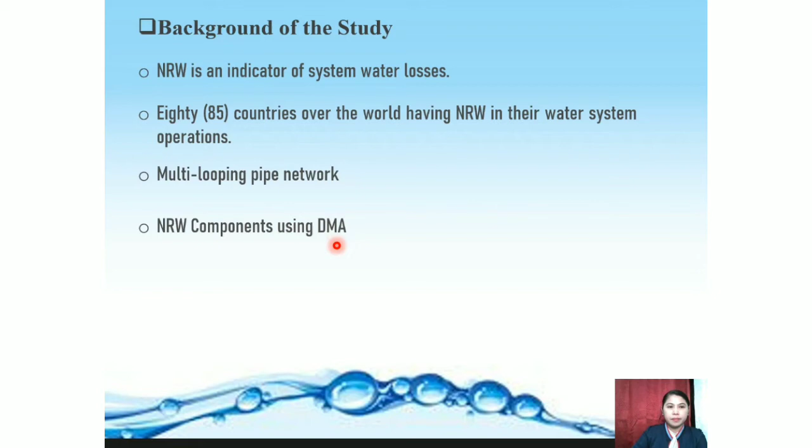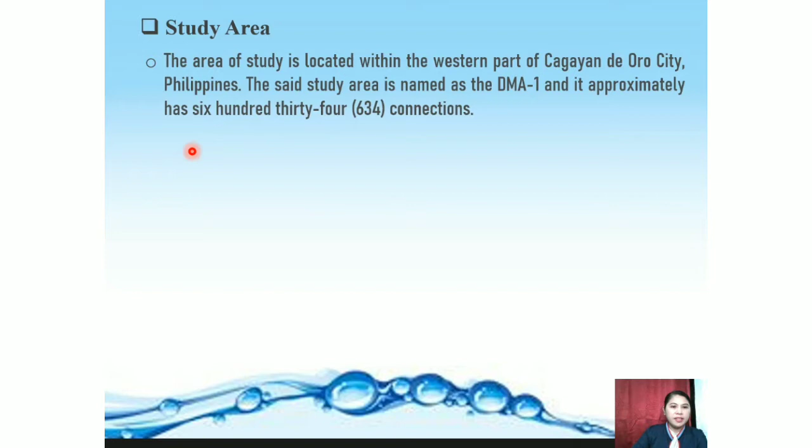The area of study is located within the western part of Cagayan de Oro City. The said area is named DMA1 for reasons of confidentiality, and this area has approximately 634 connections.

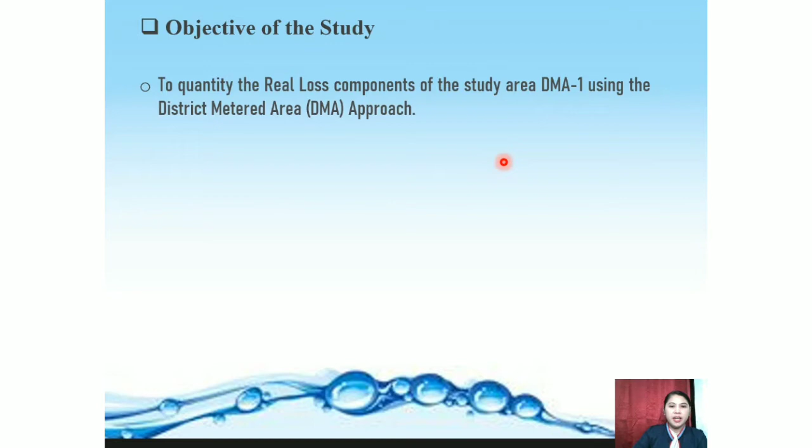The objective of the study is to quantify the real loss components of the study area, DMA1, using the district metered area approach.

For the methodology: it involves identifying the baseline, quantifying real losses through the minimum night flow, and determination of current real losses, as well as determination of unavoidable real losses.

The next step will be establishing the water balance. After establishing the water balance, the next step will be determination of the non-revenue water and determination of its real loss components.

The next steps will also include interpretation of the DMA data, the step test, leak detection and repair, and finally water loss reduction.

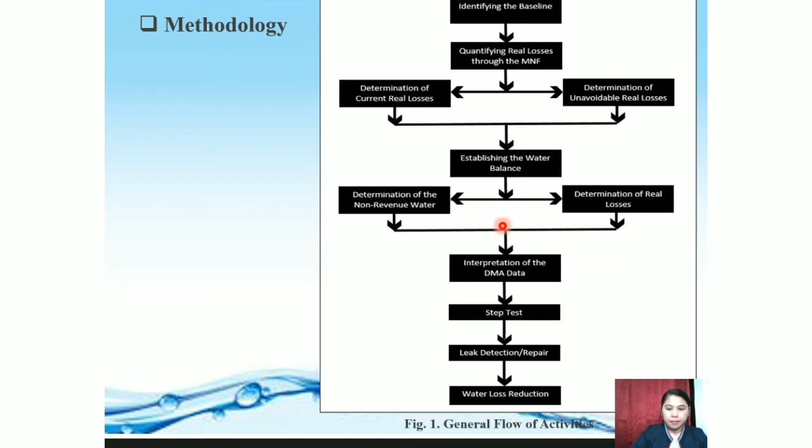Now, the formula for quantifying the current real losses, or CRL, is through the use of equation number 1 and equation number 2. In order to get the CRL during the minimum night flow, this is computed through the equation: CRL at minimum night flow equals flow during the minimum night flow, less the residential night consumption and the residential leakage.

Please take note that the CRL, or the leakage, will vary over the 24-hour period during the day, since the pressure varies according to the 24-hour time pattern. So if we want to get the CRL at any time of day, it has to be multiplied by the night-day factor. The night-day factor at any time equals the pressure at that time of day over the pressure during the minimum night flow, raised to the power of N1.

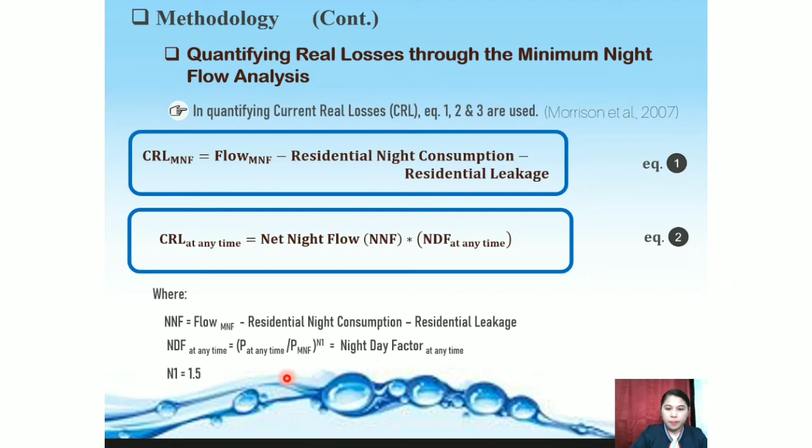This N1 is the leak exponent, and it varies from values of 0.5 to 1.5, being close to 0.5 if it is a fixed area path, meaning the pipe material is rigid, and close to 1.5 if it is a variable area path, meaning the material is made up of PVC.

URL, or the unavoidable real losses, is the lowest level of leakage achievable, and it is computed through the use of equation number 3.

In the same manner, the URL at any time is computed by multiplying the URL during the minimum night flow times the pressure at any time of day over the pressure during the minimum night flow, raised to the power of N1.

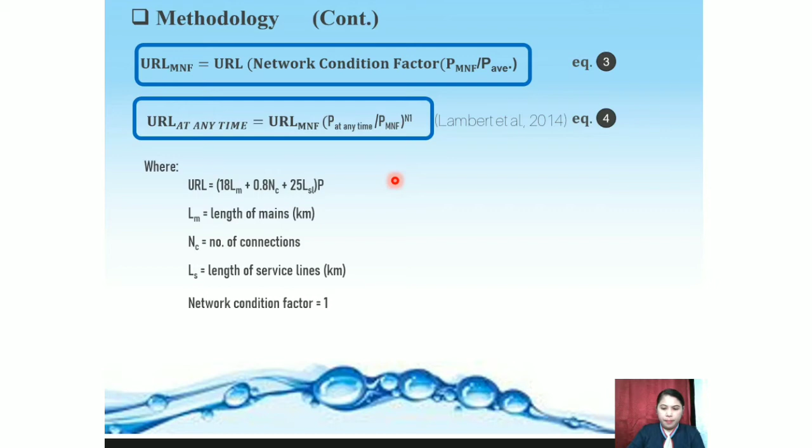In establishing the water balance, you have to compute the NRW. Take note that in this method, the component we first quantify is the real loss component. The apparent losses can then be computed using equation number 6.

After quantifying the real loss component, we already know that a certain level of leakage has to be recovered. So we need to conduct a step testing activity in order to determine which segment within the DMA area possesses much of the water losses or leakages.

The result of the step test is now the basis for leak detection. During this stage, leakage points will be localized and pinpointed.

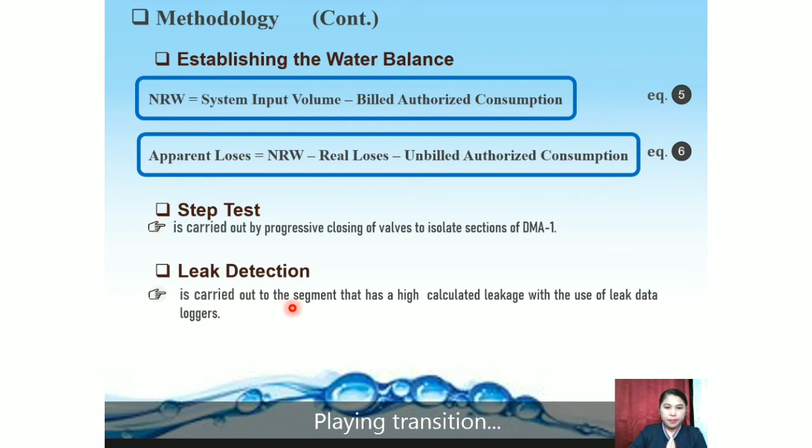After the leak detection activity, and the probable location of leakages had been marked, the area is now ready for excavation and exploration in order to locate the actual leaks.

And lastly, water loss reduction is now being monitored, since the DMA area is capable of monitoring its inflow volume.

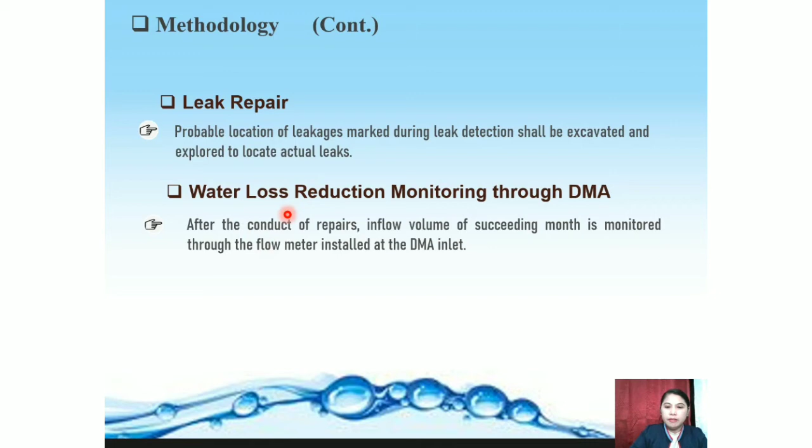Now this is the result of DMA1. The pressure of the DMA has to be assessed at the onset.

Since DMA1 has a PRV component, or pressure regulating valve, the PRV is preset to control the pressure during the period where the demand is low.

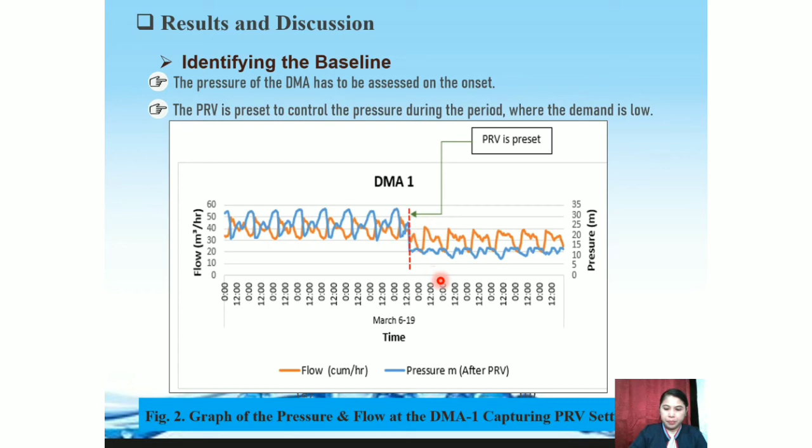By applying the formula illustrated in the methodology, this is now the graph of the CRL.

This is now the water balance of DMA1 before the intervention. It has an NRW of 9,369 cubic meters per month, and real losses which comprised 88% of the NRW component, or an 8,249 cubic meter flow rate. In other words, DMA1 possesses a high volume of leaks.

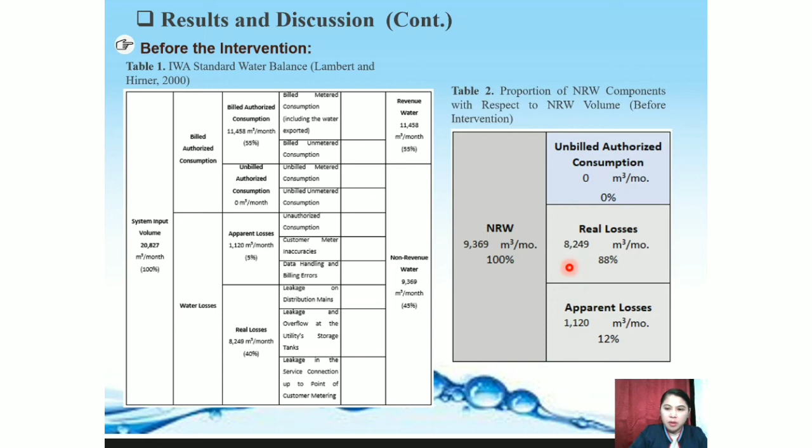Step test is being undertaken in the area. This can be done by progressively closing the valves per segment, and the corresponding drop of flow has been recorded.

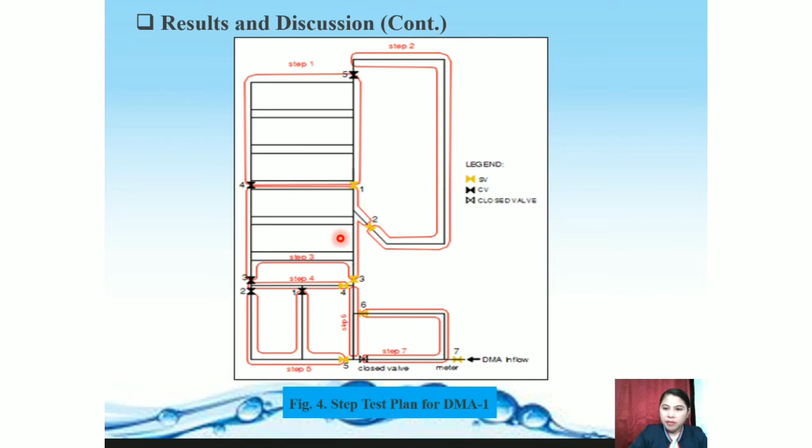The result shows that segment 1 has a high volume of flow drop, and after computing the theoretical leakage volume, leak detection and repairs were undertaken in the area.

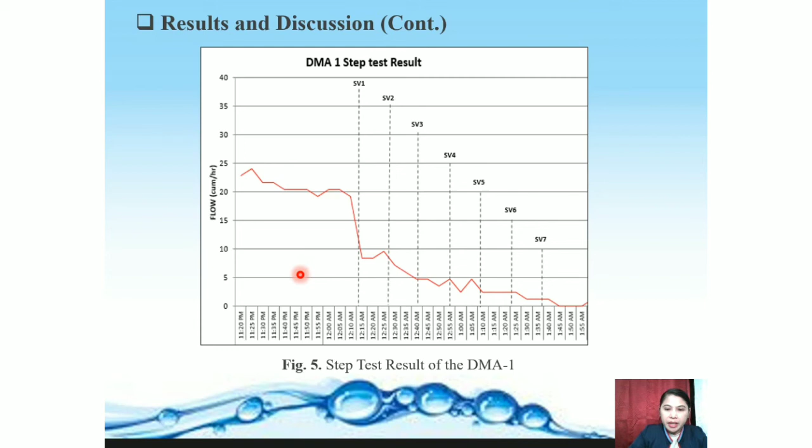This resulted in the decrease of the CRL in DMA1, which has been clearly shown in the graph.

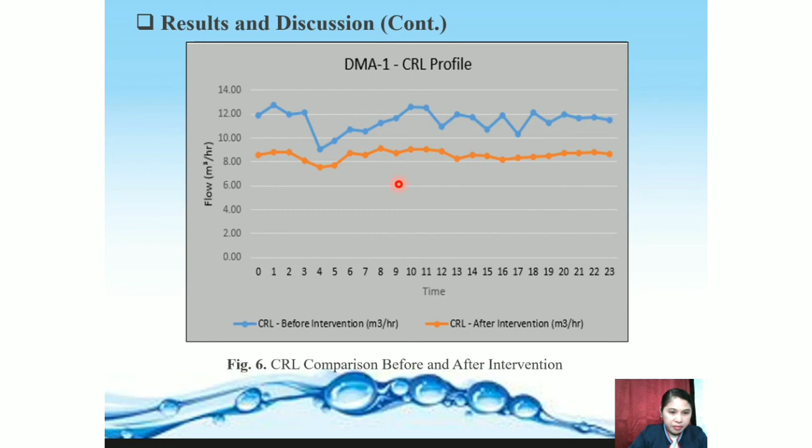After the intervention, the water balance and the real loss components have been quantified again, and effectively the NRW gets lowered from 9,369 cubic meters per month to 6,390 cubic meters per month.

This is due to the reason that the real losses have decreased from 8,249 cubic meters per month to 6,171 cubic meters per month.

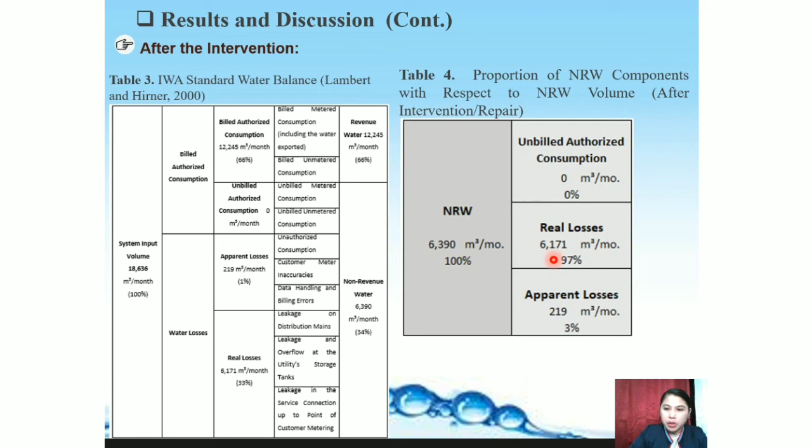As a conclusion, the assessment of real losses using the minimum night flow analysis through a DMA approach is very effective, since after repairs at segment 1, the NRW of DMA1 decreases.

That is, the rate of NRW reduces from 9,369 cubic meters per month to 6,390 cubic meters per month, or from 45% reduces to 34%.

As for recommendation, first, it is recommended to continue the real loss reduction at DMA1 in order to check if there are still leakages in the area.

Second, it is also recommended to conduct another step test in order to re-evaluate the leakage level of DMA1, if there are still existing leakages in the area.

Additionally, to validate my findings, a top-down assessment of water losses can be used to quantify each component of NRW.

Remember that by identifying exactly the real loss component of the NRW, it is obvious that there can be a bigger opportunity for real losses to be recovered. And by that, DMA1 can be as economic and efficient a district metered area as a water utility can be.